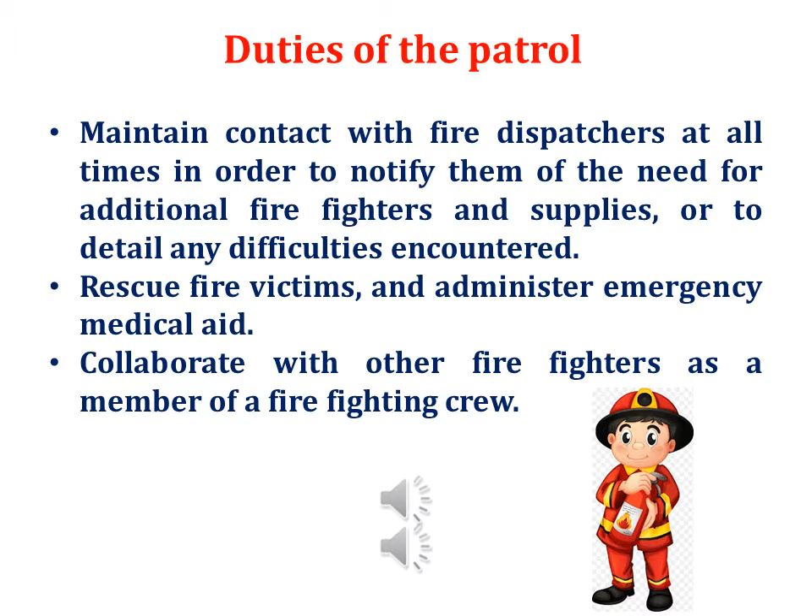Operate pumps connected to high-pressure hoses. Participate in physical training in order to maintain high levels of physical fitness.

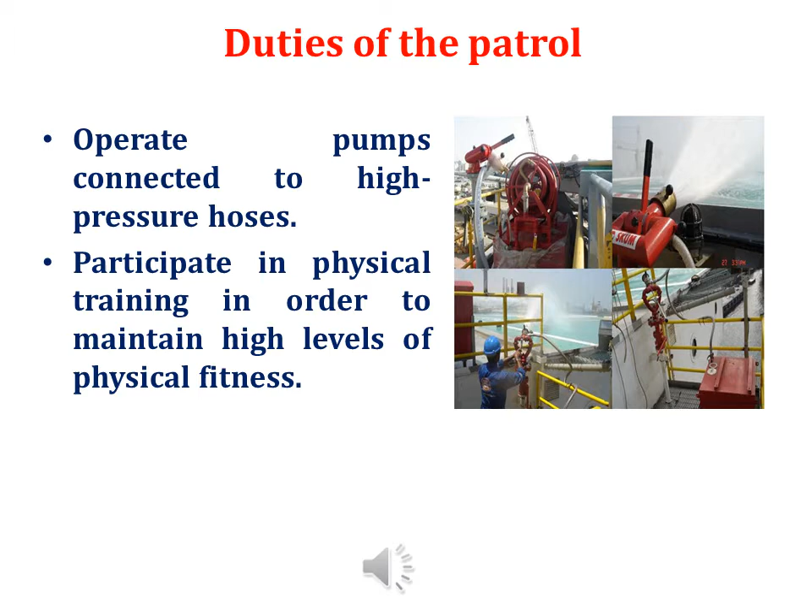Maintenance of equipment. Fire protection and firefighting systems and appliances shall be maintained, tested and inspected, ready for use at all times while the ship is in service.

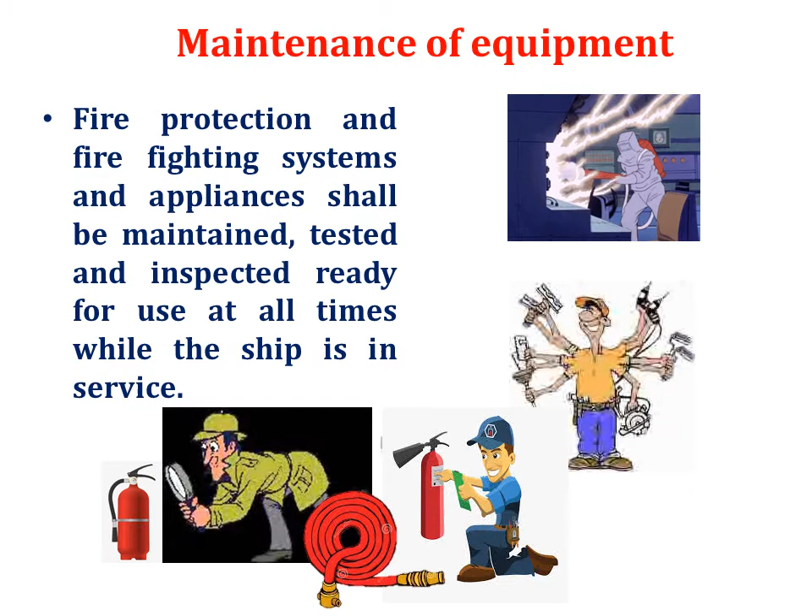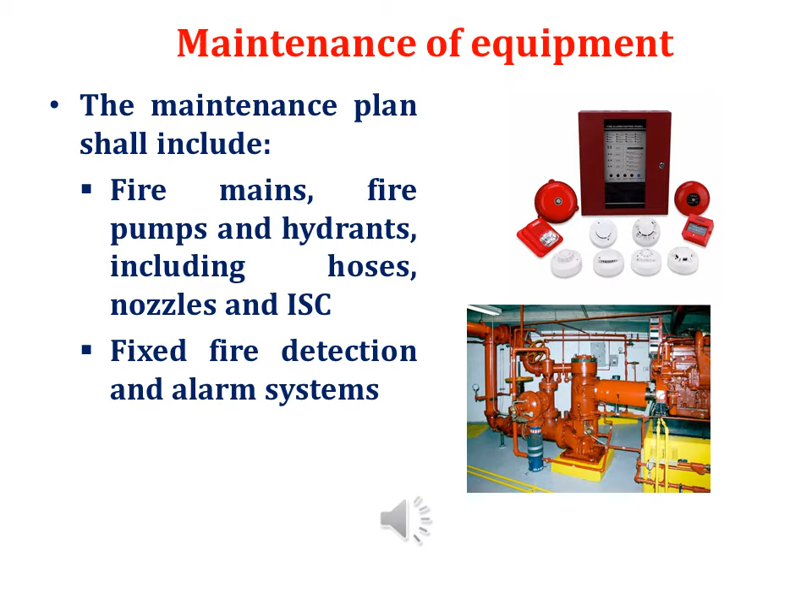The maintenance plan shall include fire mains, fire pumps and hydrants, including hoses, nozzles and ISC, fixed fire detection and alarm systems. Maintenance plan shall be kept on board ships and shall be available for inspection whenever required by the administration. Maintenance, testing and inspection shall be carried out based on the IMO guidelines. The maintenance program may be computer-based.

Topic number 7, Actions to be taken on board ship. Seafarers on board now have advanced technologies, advanced training that will maximize the fire prevention aspects of ship's operation.

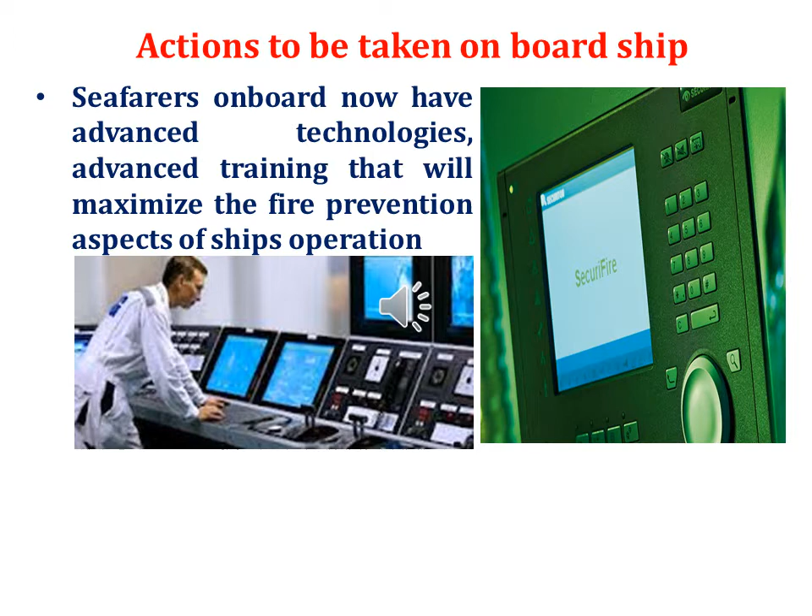Safe practices on board ships. General safety procedures to enhance fire prevention on board ships. No smoking in hazardous areas. Ability to raise the fire alarm quickly. Ability to extinguish fire by using portable extinguishers and other methods. Ability to recognize fire hazards and to take the necessary steps to prevent fire.

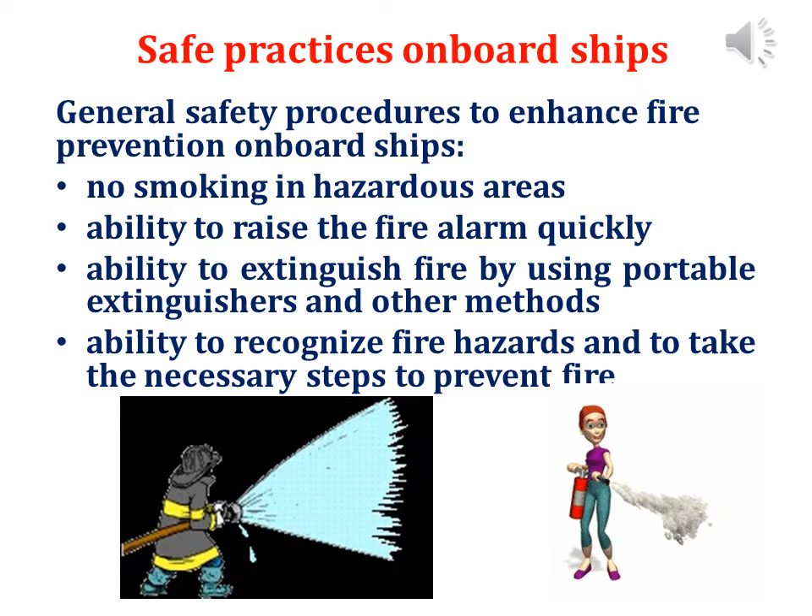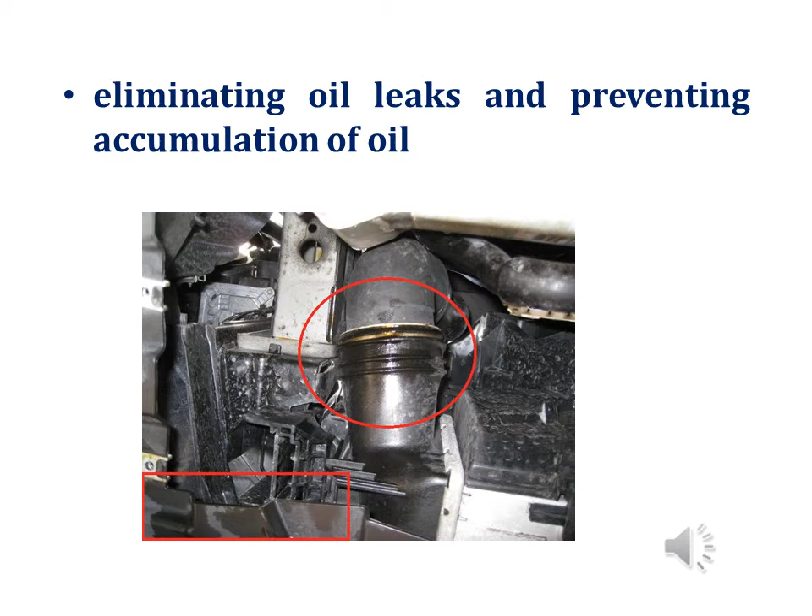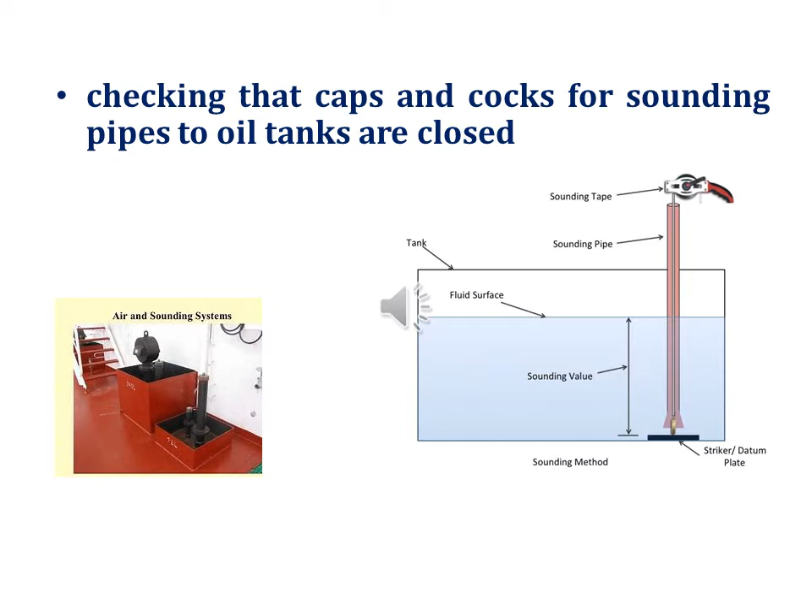Reducing fire hazards in the engine room. Ensuring insulation and lagging are kept in good condition. Eliminating oil leaks and preventing accumulation of oil. Taking proper fire precautions when welding or burning is being carried out. Checking that caps and cocks for sounding pipes to oil tanks are closed. Maintaining a clean engine room, removing oil-soaked rags.

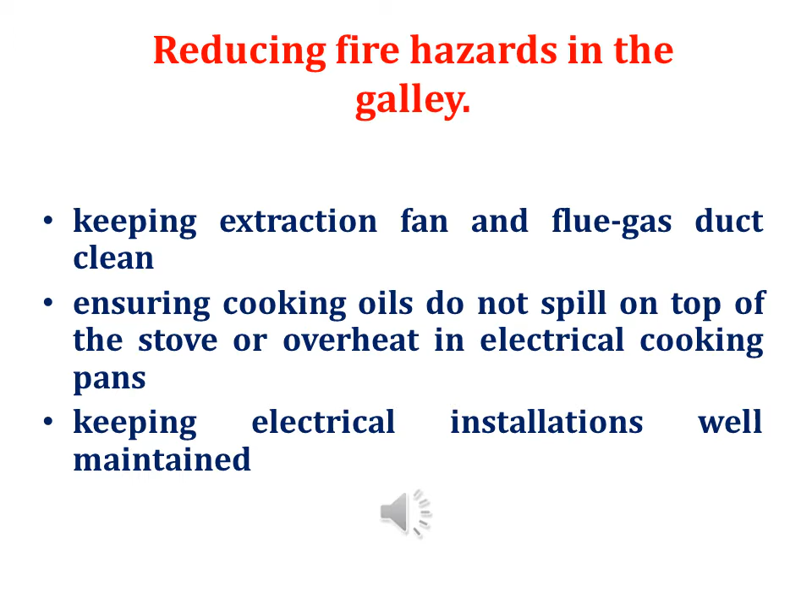Reducing fire hazards in the galley. Keeping extraction fan and flue gas duct clean. Ensuring cooking oils do not spill on top of the stove or overheat in electrical cooking pans. Keeping electrical installations well maintained. Reducing fire hazards in accommodation area. No smoking in bed. No unauthorized electrical fittings. No emptying of ashtrays into waste paper bins without ensuring all cigarette ends are extinguished.

Measures for reducing fire hazards in cargo spaces. Ensuring hatches are correctly cleaned. Ensuring cargo is stowed and ventilated in accordance with the rules. Prohibition of smoking during cargo working periods. Securing of cargo. Inerting the atmosphere in cargo compartments when required. Ensure hold and cargo compartment lights are switched off and cargo clusters disconnected, removed and stored away after use and before closing of hatches.

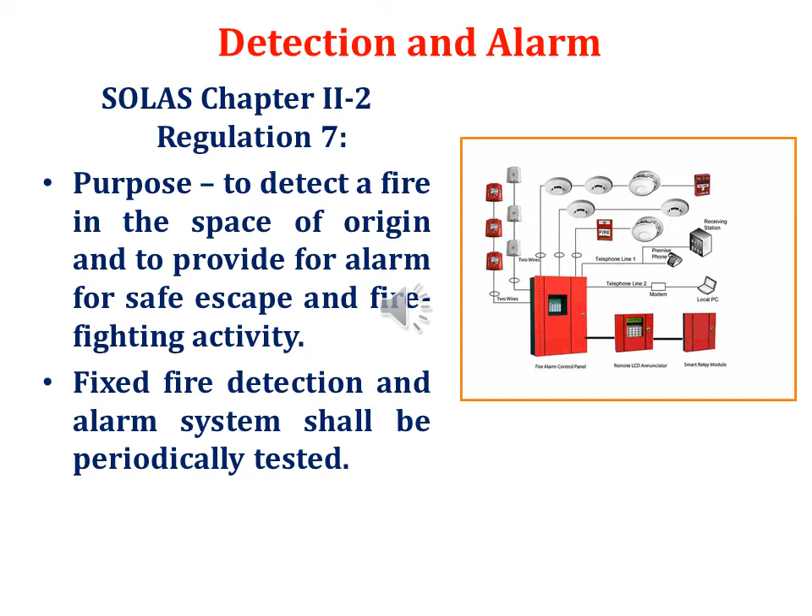Topic number 8, Fire and smoke detection and automatic alarm systems. Detection and alarm, SOLAS Chapter 2 Regulation 7. Purpose: to detect a fire in the space of origin and to provide for alarm for safe escape and firefighting activity. Fixed fire detection and alarm system shall be periodically tested. Where are fire detection and alarm systems usually installed? Machinery spaces, enclosed spaces containing incinerators, accommodations, cabins, in all stairways, corridors and escape routes.

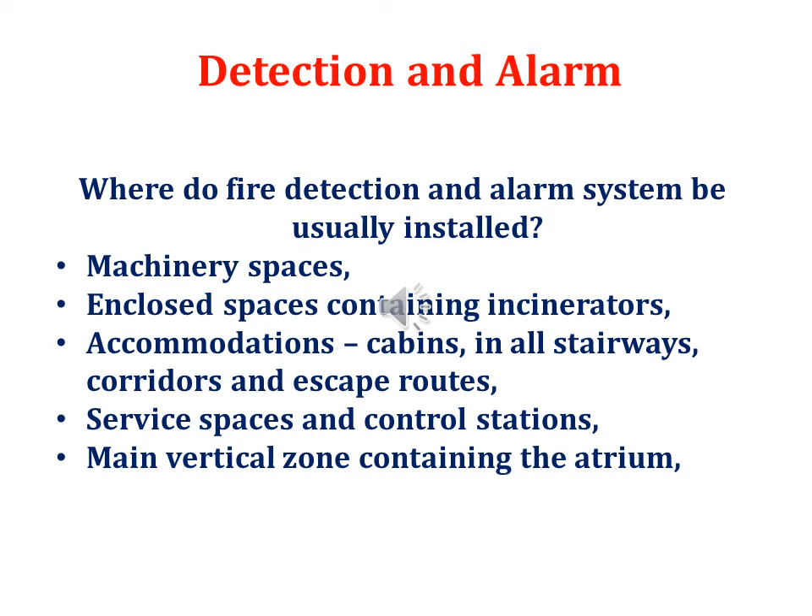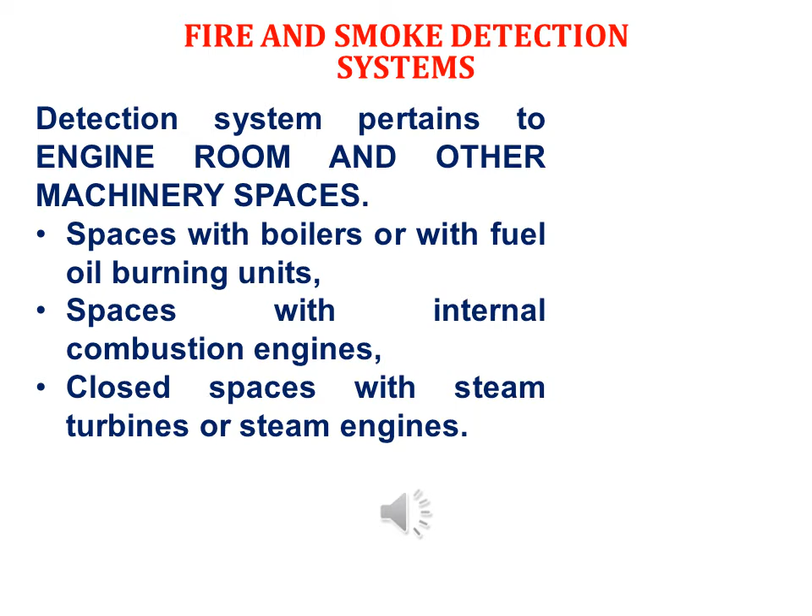Fire and smoke detection systems. Fire detection control unit. A red light indicates fire or smoke. A blue light indicates trouble in the system. Fire detectors sense and initiate a signal in response to heat, smoke, flame or some other indication of fire.

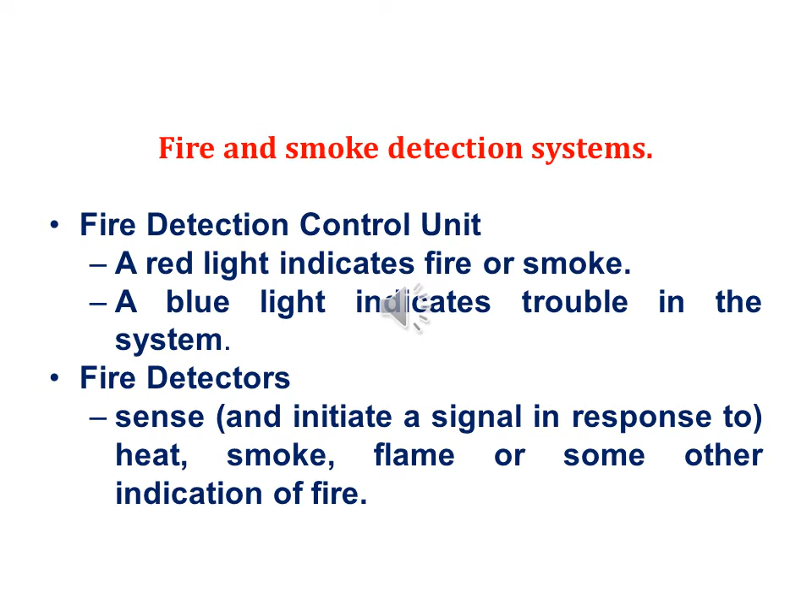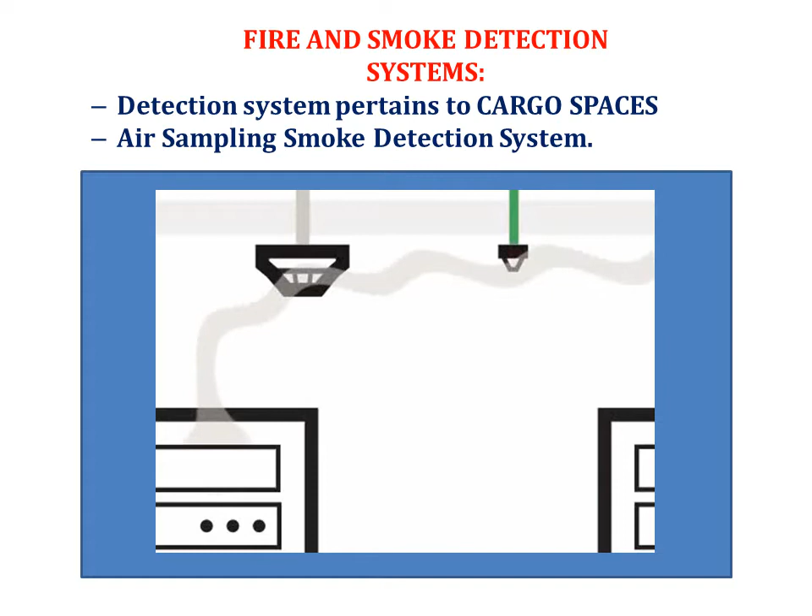Fire and smoke detection systems. Reflection-type photoelectric smoke detector. Automatic sprinkler systems. Detection system for cargo spaces: air sampling smoke detection system. Detection system for bridge and other control rooms. Fire detectors. Sprinkler. Fire extinguisher.

Automatic fire alarm. The operation of an automatic fire alarm. Automatic detectors are meant to imitate one or more of the human senses of touch, smell or sight. System which has fire zones and state where such a system may be installed in a ship. Zone valves and zone chart for a shipboard sprinkler system.

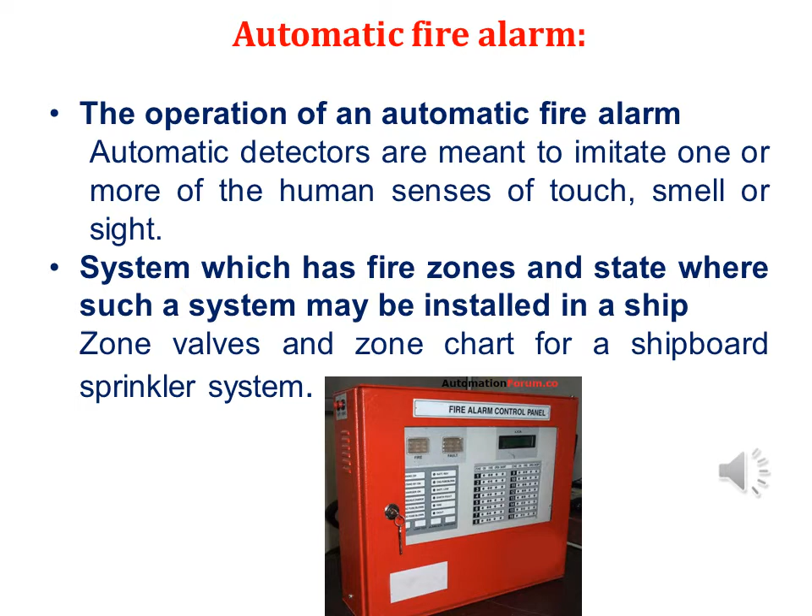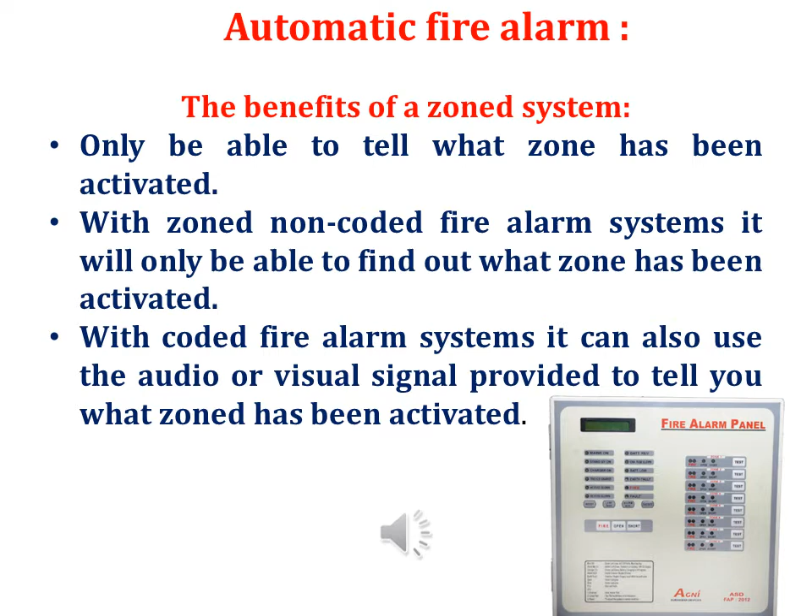Automatic fire alarm. The benefits of a zone system. With zoned non-coded fire alarm systems you will only be able to find out what zone has been activated. With coded fire alarm systems you can also use the audio or visual signal provided to tell you what zone has been activated. Carbon monoxide alarm. Carbon monoxide detector.

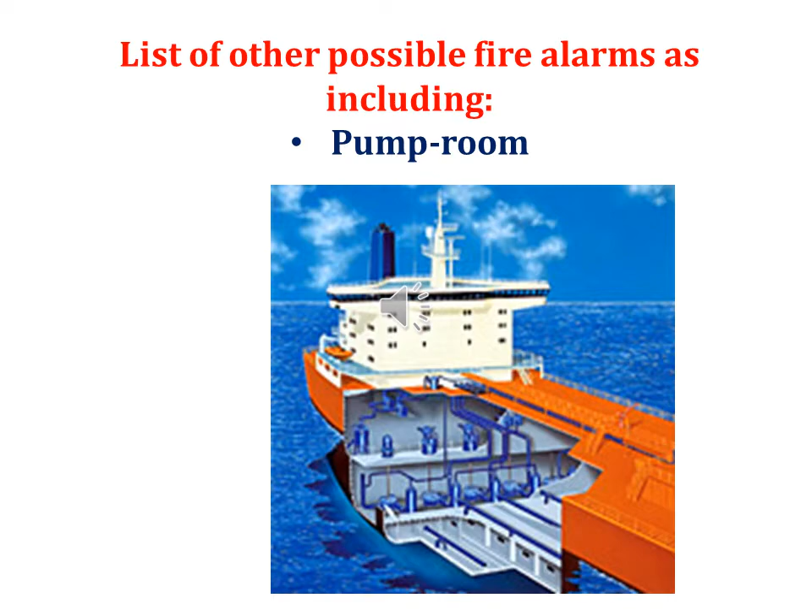List of other possible fire alarms, including pump room, manually operated, UMS fire detection system.

Fire alarms and first actions. Actions to be taken upon discovery of fire. Raise the emergency alarm. Determine location of the fire or explosion. Check for oil, hazardous substances, pollution and possibility of one. Determine any casualties and provide first aid if necessary. Find out the type of fire.

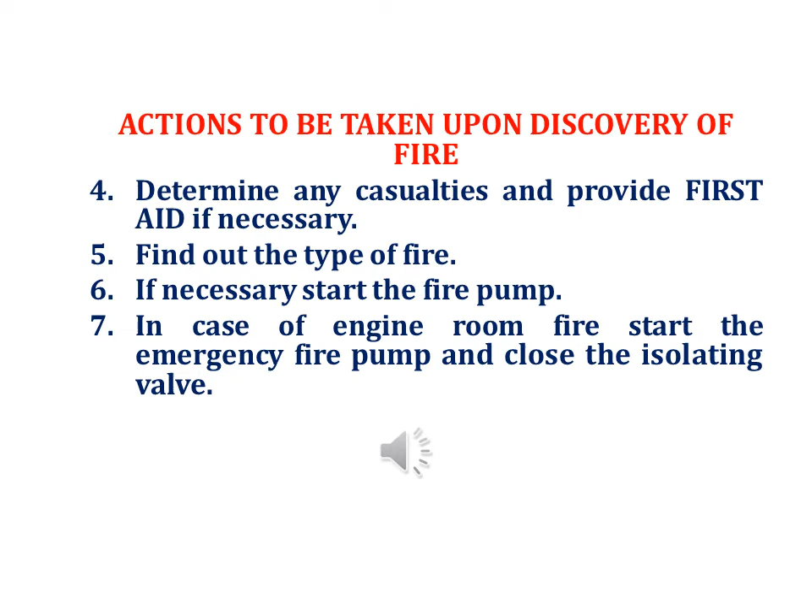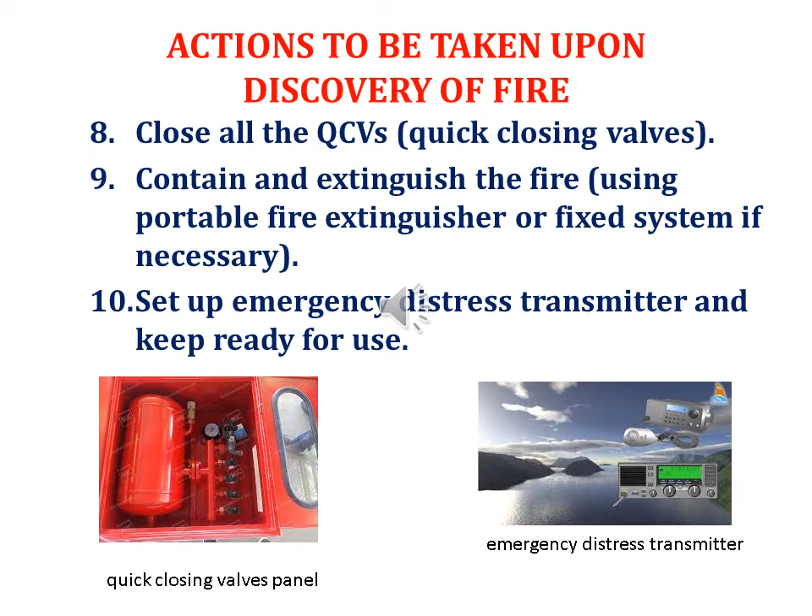If necessary, start the fire pump. In case of engine room fire, start the emergency fire pump and close the isolating valve. Close all the QCVs, quick closing valves. Contain and extinguish the fire, using portable fire extinguisher or a fixed system if necessary. Set up emergency distress transmitter and keep ready for use.

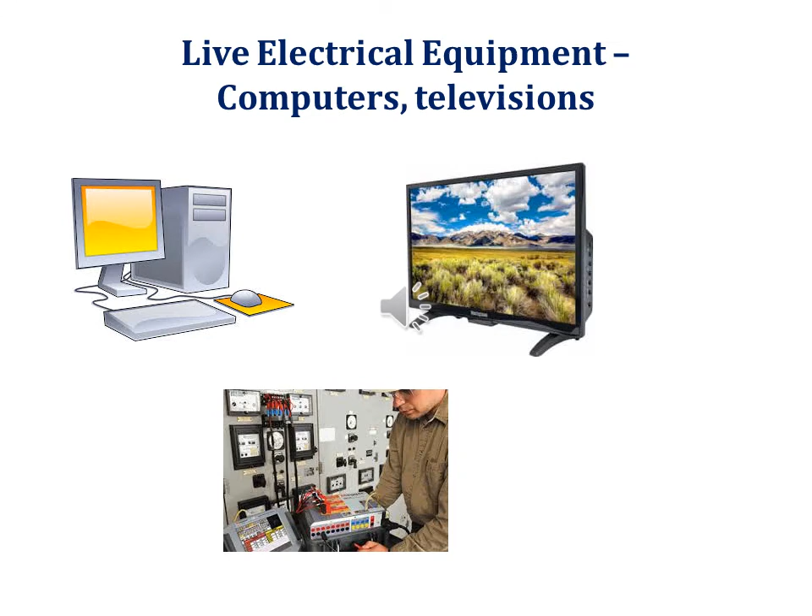Topic number 9. Classification of fires and appropriate extinguishing agents. Classification of fires. Combustible solids, wood, paper, textiles and similar materials. Flammable liquids and gases. Live electrical equipment, computers, televisions. Combustible metals. Class K fires, cooking media. Examples: cooking oil and fats.

Portable fire extinguishers. Fire extinguishing agents. Water fire extinguisher, applicable for Class A fires. Carbon dioxide extinguisher, applicable for Class B liquids and C fires. Foam, appropriate for Class A, B and K. Dry chemical powder extinguishers, applicable for ABC fires. Smothering effect systems, carbon dioxide, CO2, and foams.

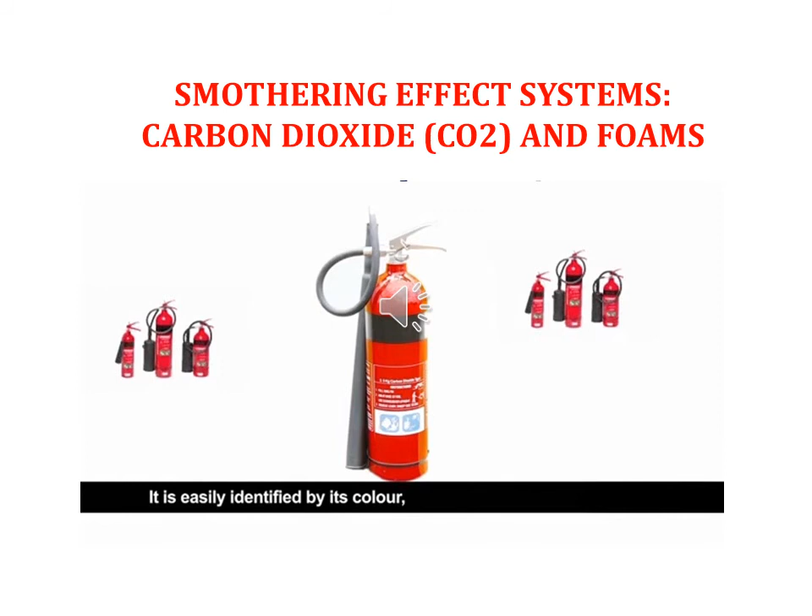How to use a carbon dioxide fire extinguisher. You have selected to view a carbon dioxide fire extinguisher, sometimes referred to as a CO2 extinguisher. It is easily identified by its colour, red, with a black band. It is also identified by its cone-shaped discharge nozzle. It contains carbon dioxide in liquid form under pressure. Because CO2 is a non-conductor of electricity, it is most suited for fires in equipment connected to an electrical source.

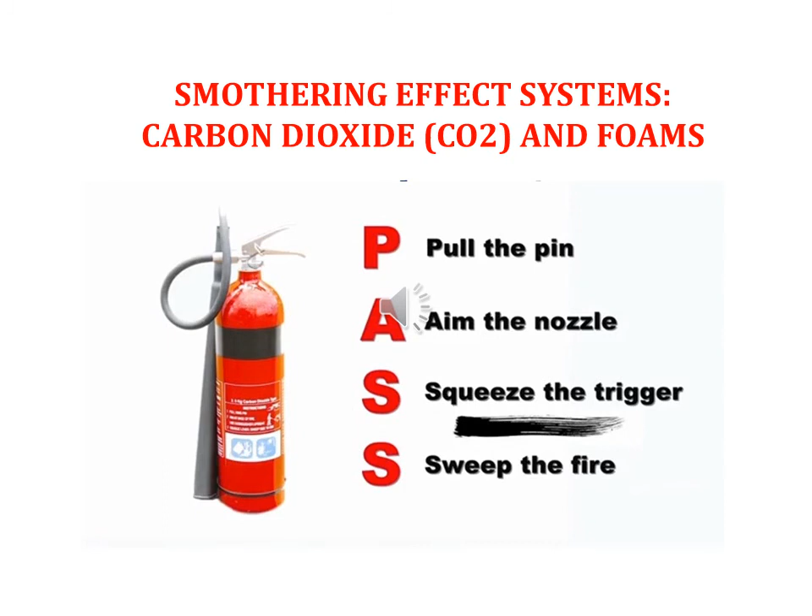To operate a CO2 extinguisher, as with most types of fire extinguishers, remember the PASS acronym. P, pull the pin. A, aim the nozzle. S, squeeze the trigger. S, sweep the fire. Pull the pin. Hold the extinguisher upright, twist the pin to break the seal, then pull the pin to release the trigger mechanism.

Aim the nozzle. Stand back at a safe distance, aim the nozzle at the base of the flames, hold the hose above the discharge horn to avoid freeze burn. Squeeze the trigger. Grip the trigger so that the upper and lower parts of the trigger are pressed together. The contents of the extinguisher...